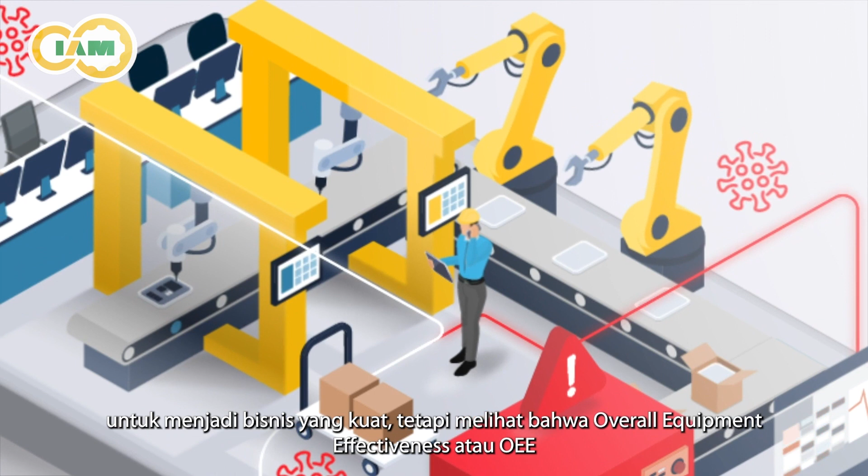Today's globalized world is getting more challenging and competitive. It is forcing the industrial sector to be tougher and aware about leveraging their value, not just through savings, but better asset management and maintenance strategies to become a powerful business. Overall equipment effectiveness (OEE), reliability and availability improvement, and cost-effective maintenance are becoming a must-have versus an option.

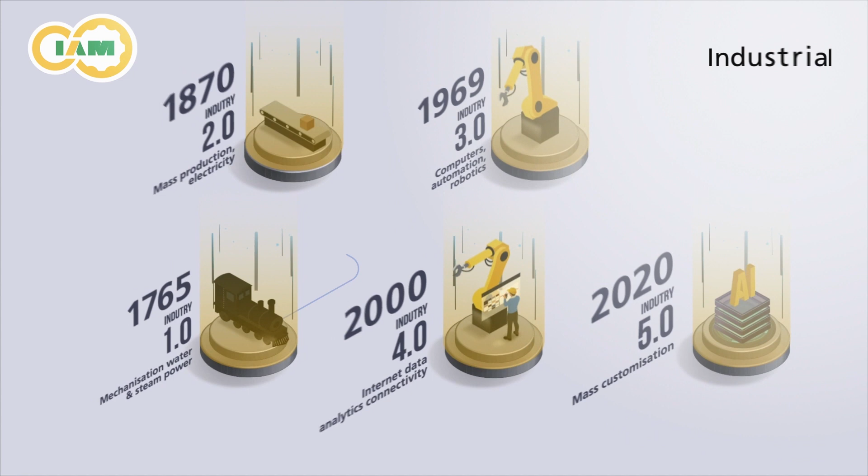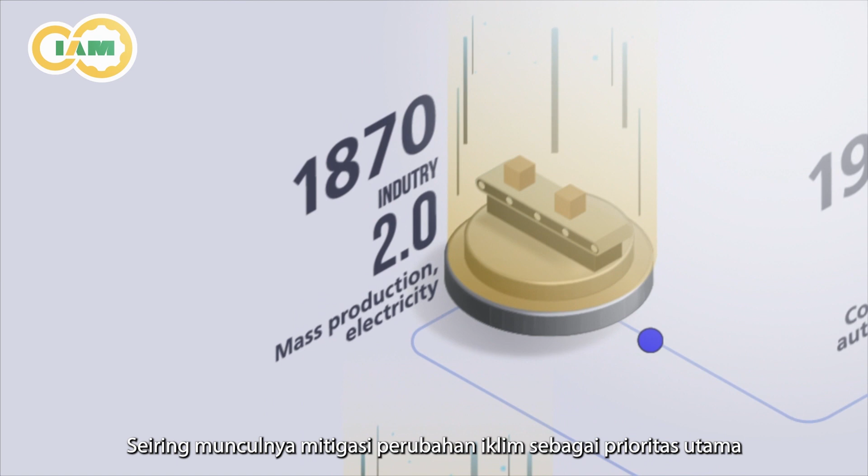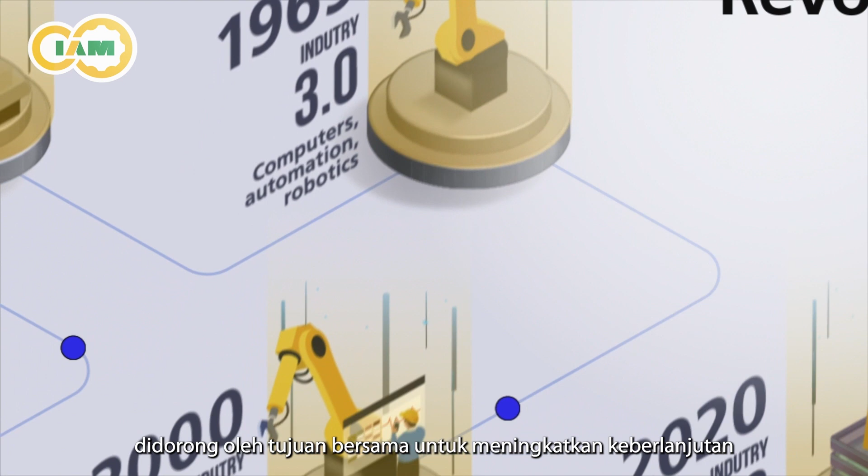Additionally, we need to deal with climate change, the issue of carbon emissions, and the implementation of carbon taxes. This is increasingly encouraging companies to review their operating processes to become more efficient, cleaner, and sustainable. The Industrial Revolution's environmental impact is known to be a bad one, with the increase of production in wasteful and greenhouse gas-emitting industries. With climate change mitigation emerging as a top priority, the next industrial revolution could very well be one where men, machines, innovation, productivity, and profitability are driven by the common purpose of increasing sustainability. A revolution that leads people to consider the environment and focus on doing more with less. Then fully integrated industrial asset management becomes the best solution to this matter.

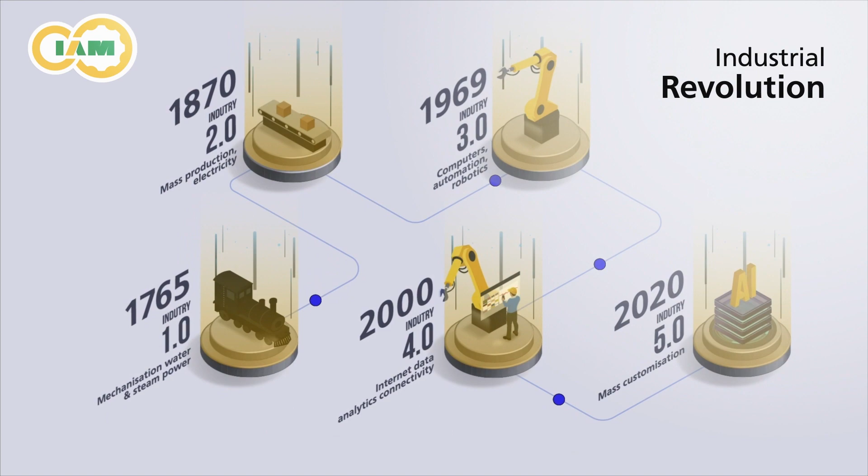The Sustainable Development Goals are the blueprint to achieve a better and more sustainable future for all. They address the global challenges we face, such as poverty, inequality, climate change, environmental degradation, peace, and justice. Every company is encouraged to contribute to the achievement of the United Nations Sustainable Development Goals. Therefore, good asset management is needed, as it inherently contributes to 7 of the SDGs.

Specifically, asset management improves an organization's sustainability by effectively managing expenditures and activities to achieve both short and long-term intended impacts, including the sustainability of operations and performance. Asset management processes clearly demonstrate social responsibility and ethical business practice by improving the ability to reduce emissions, conserve resources, and adapt to climate change. Asset management also improves efficiency and effectiveness by reviewing and improving processes, procedures, and asset performances.

On January 15, 2014, the Technical Committee TC 251 from ISO concluded its work and finally published the set of ISO 55000 regulations for asset management. It is a set of international consensus standards that provide requirements and specifications for an integrated, effective system for managing assets. The development of ISO 55001-2014 follows this structure: context of the organization, leadership, planning, support, operations, performance evaluation, and continuous improvement.

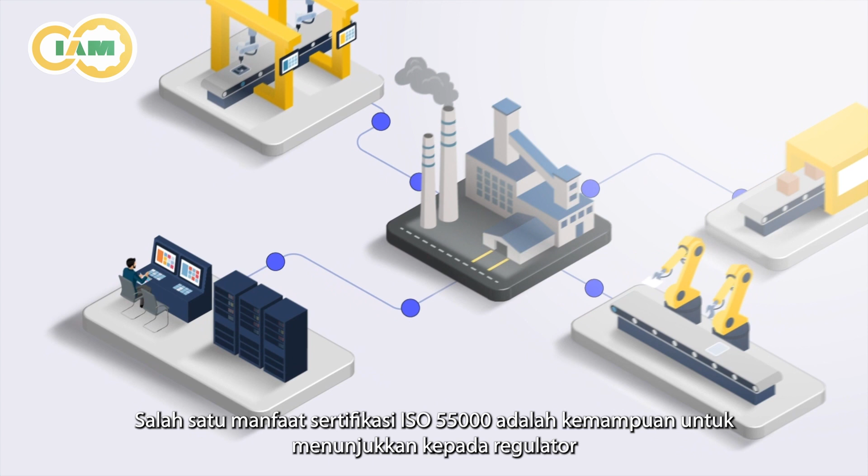The adoption of ISO 55001, ISO 55002, and this international standard enables an organization to achieve its objectives through the effective and efficient management of its assets. One of the benefits of ISO 55000 certification is the ability to show regulators, stakeholders, and customers that the organization maintains its assets in accordance with a stringent level of diligence and quality parameters necessary to achieve and maintain the certification.

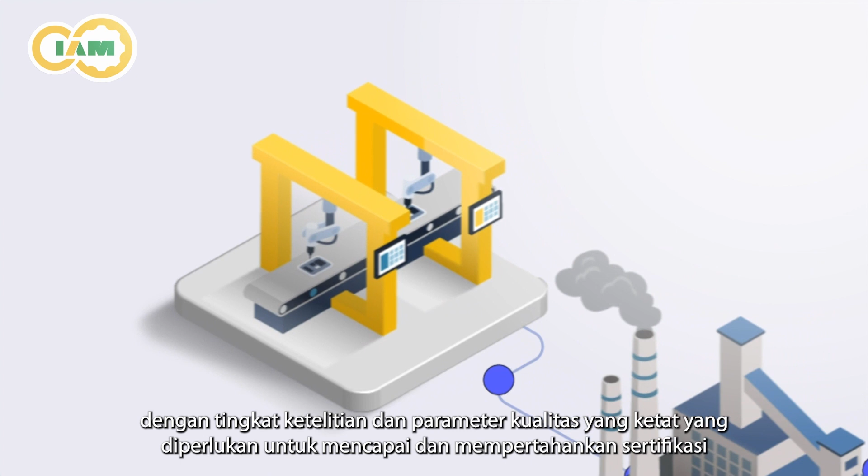Adopting an asset management framework based on the ISO 55000 standard demonstrates that the organization has an asset management system to manage performance, risks, reliability, and costs in a very effective and efficient manner.

An asset management system is any process a company or organization uses to keep track of the equipment and inventory vital to the day-to-day operation of their business. There are many standards and certifications for asset tracking, including ISO 55001, an asset management system standard to help organizations manage the life cycle of assets more effectively.

Implementing the ISO 55001 standard can help companies and organizations obtain control over their daily activities, achieve higher returns with their assets, reduce costs, and mitigate risk. Additionally, establishing the standard raises the bar on performance and effectiveness, and its benefits may be applied to any fixed asset in any organization in any industry.

Every asset goes through stages during its life: design, acquire, operate, maintain, and dispose. Each stage plays an equally important role in ensuring you get the most from your assets. Asset lifecycle management is a strategic and analytical approach to the management of a business's assets, a process of optimizing an asset's reliability and operational performance during its lifespan.

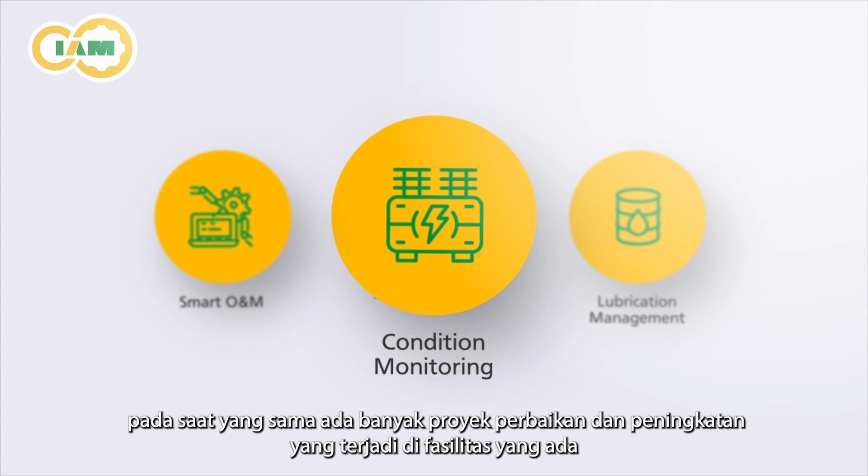Today, there is a lot of investment in new production capacity from many different manufacturing sectors. At the same time, there are many improvement projects and upgrading happening in existing facilities. To support this situation, we are developing these following capabilities.

We have designed and developed IAM as a reliable partner for our customers to achieve their asset management targets and objectives precisely and efficiently. Smart Operation and Maintenance, or Smart O&M,

is a solution designed to help companies increase their profitability by improving the management of corporate assets, increasing employees' productivity, and reducing costs, while ensuring regulatory compliance.

Smart O&M enables you to do asset register, master data, cataloging, while at the same time analyzing reports on condition monitoring, lubricant management, and managing asset integrity efficiently.

Asset information is the fundamental of asset management. Through asset register and master data, a company can easily manage their assets by registering the ID, tag number, details, location, units, working procedures, and even the parts.

IAM helps companies to record asset information by performing asset register, master data, and cataloging appropriately. This neatly registered data will later be useful to assist a company in various crucial analyses in asset management.

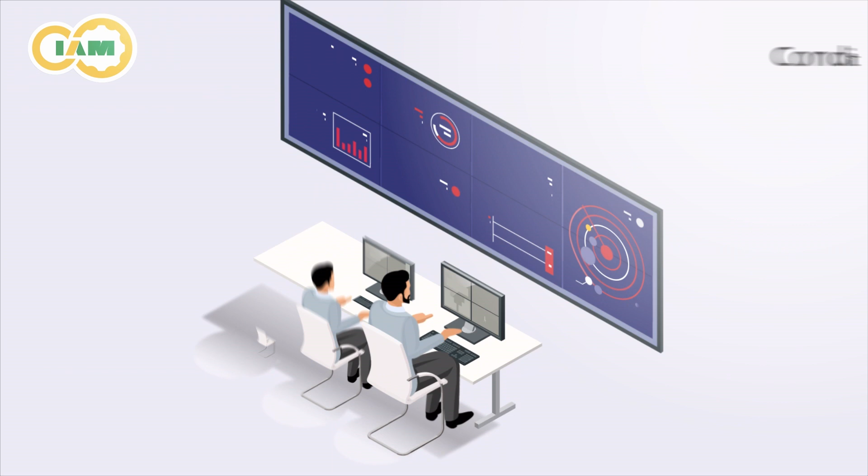Condition monitoring. IAM provides an integrated condition monitoring, a maintenance approach that predicts machine health and safety through the combination of machine sensor data that measures vibration, temperatures, and other parameters in real time with state-of-the-art machine monitoring software.

With condition monitoring, we can analyze any anomalies that occur in a machine or equipment more accurately so that we can prevent machinery and equipment damage or failure.

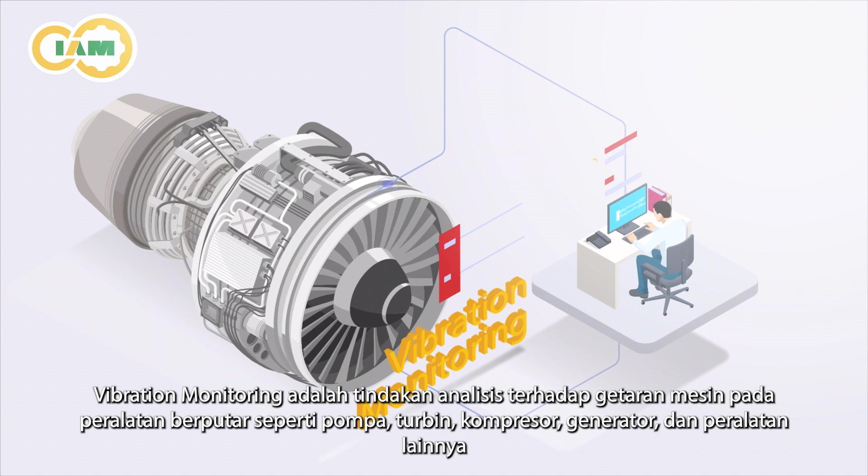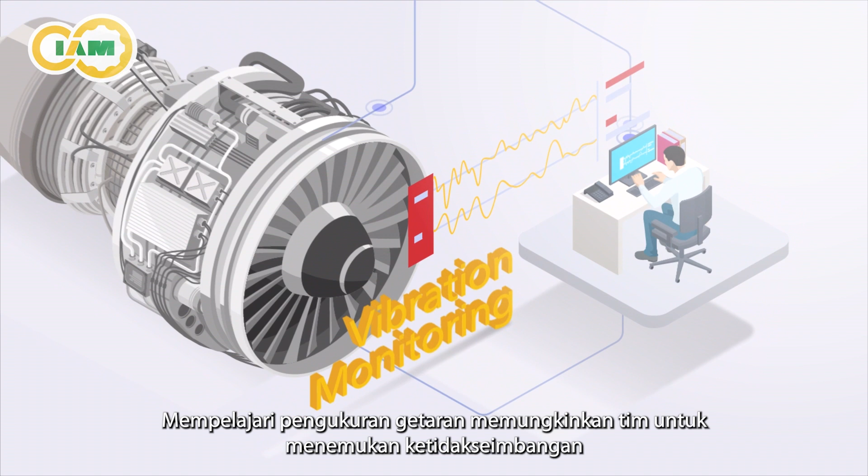Vibration monitoring is an analytical action of engine vibration on rotating equipment such as pumps, turbines, compressors, generators, and other equipment. Vibration monitoring uses sensors and tools to detect changes in amplitude, frequency, and intensity of forces that damage rotating equipment. Studying vibration measurements allows teams to discover imbalance, looseness, misalignment, or bearing wear in equipment prior to failure.

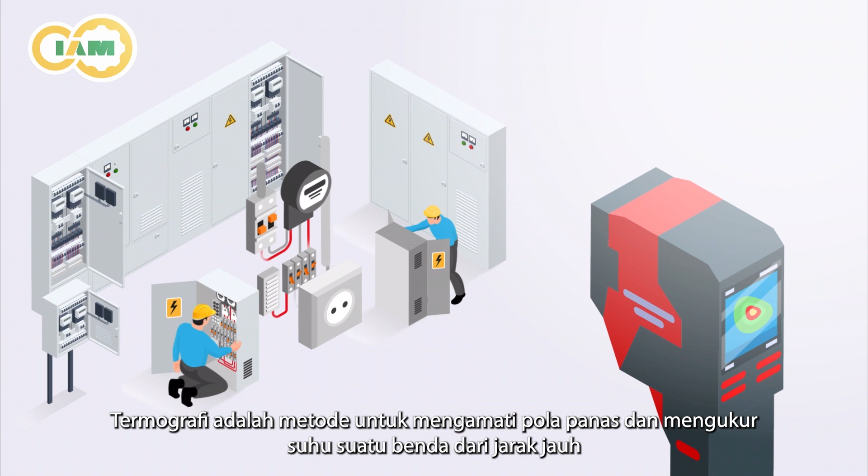Thermography is a method to observe the pattern of heat and measures the temperature of a body remotely and provides the thermal image of the entire component or machinery. Thermography helps you to estimate components' approximate temperature to determine the severity of an adverse condition.

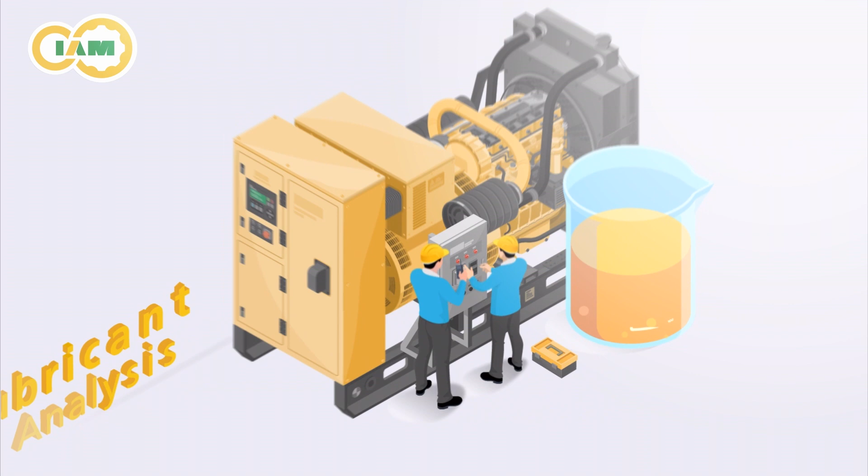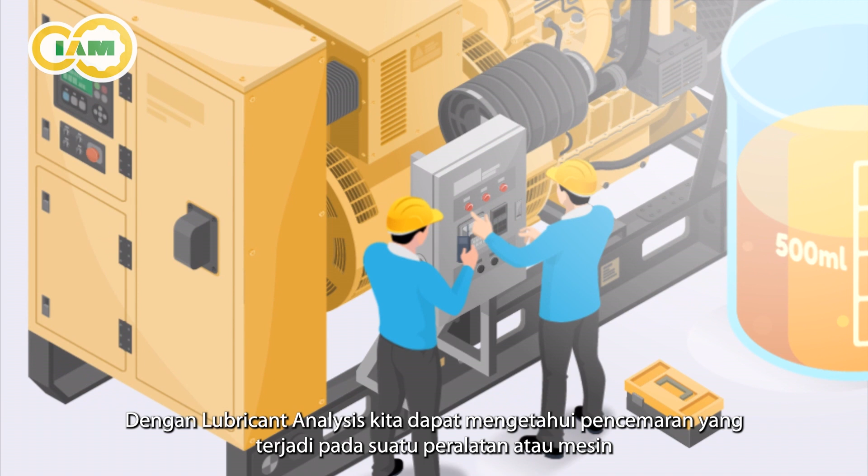Lubricant analysis is an analytical method to monitor the condition of the equipment by analyzing the lubricant in the machine or equipment. With lubricant analysis, we can determine the contamination that occurs in an equipment or machine, such as contamination of water, particles, or other foreign objects.

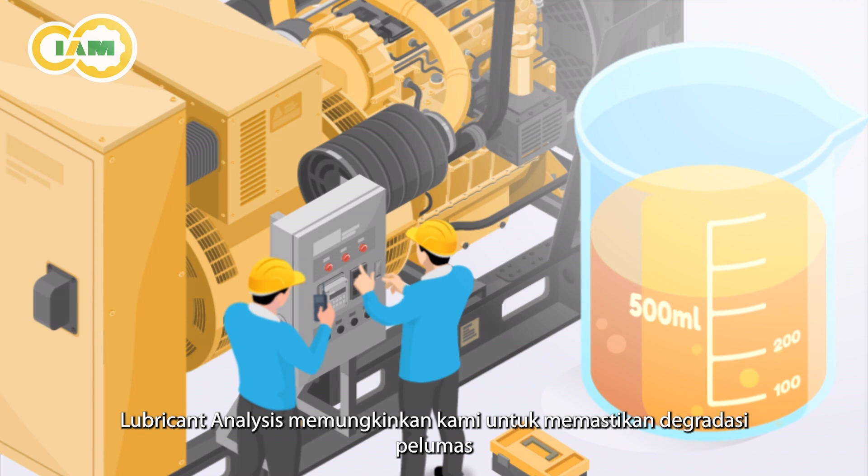Lubricant analysis enables us to determine the degradation of lubricants, as well as helps us to detect the level of wear on equipment made of metal. With that, we can do further inspections on the components that are experiencing wear and tear.

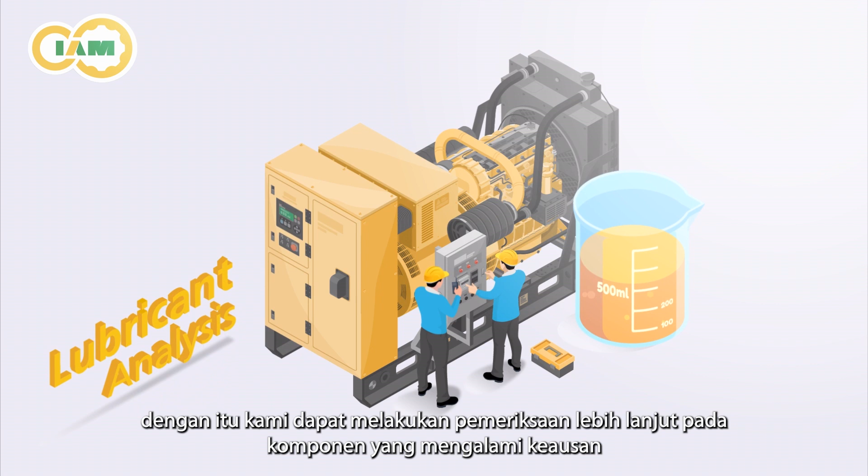Non-destructive testing is a method to determine the condition of the equipment by doing some testing without damaging the equipment. This method is carried out with ultrasonic thickness, which is measuring the thickness of an object using ultrasonic vibrations.

Asset integrity. As part of asset integrity, RAM analysis is a method used to predict and quantify asset performance with certain configuration from a complex system, with a point of view from reliability, availability, and maintainability.

There are several parameters that are considered as key performance indicators within every operation and maintenance activity carried out on equipment, such as availability, reliability, overall equipment effectiveness, failure rate or mean time between failure, and mean time to repair.

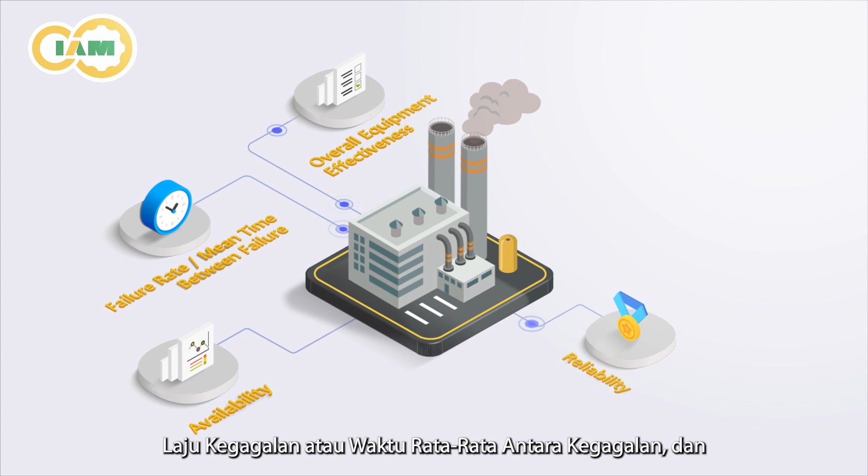IAM provides an asset integrity consultancy to help a company manage its key performance indicators correctly and accurately. It consists of several methodologies, including

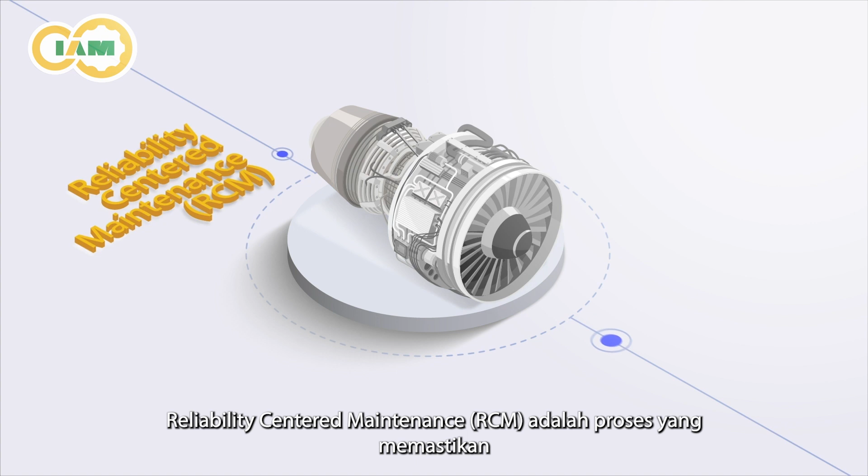reliability-centered maintenance. RCM is a process that ensures maintenance tasks are performed in an efficient, cost-effective, reliable, and safe manner. It is commonly used for rotating equipment and electricals.

Risk-based inspection, RBI, is an optimal maintenance business process used to examine static equipment such as pressure tanks, valves, vessels, boilers, heat exchangers, and piping in industrial plants.

Failure modes and effects analysis, FMEA, is a step-by-step approach for identifying all possible failures in a design, a manufacturing or assembly process, or a product or service. It is a common process analysis tool.

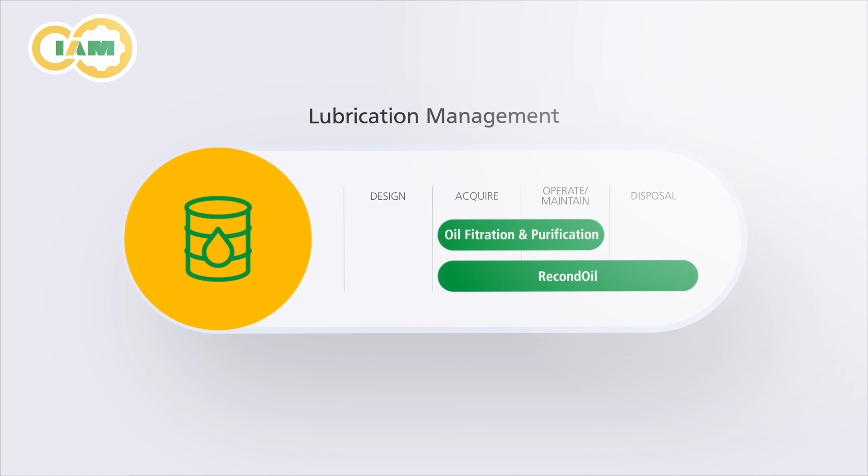Lubrication management. To support lubrication management activity, IAM provides lubricant management solution through various services and methods, including

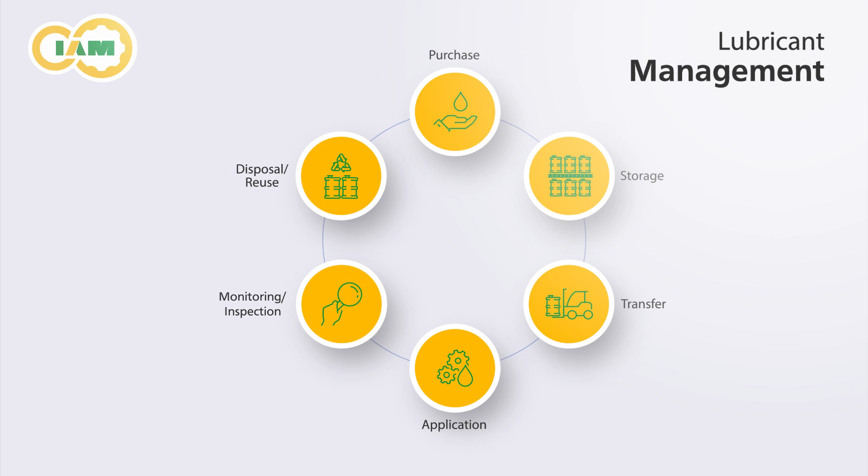oil filtration, which is designed to remove contamination, such as water, particulate, varnish, and/or entrained gases from a wide variety of fluids, including turbine oil, hydraulic oil, gear oil, and fuel oil.

Oil purification, which is removing oil contaminants in order to prolong oil service life.

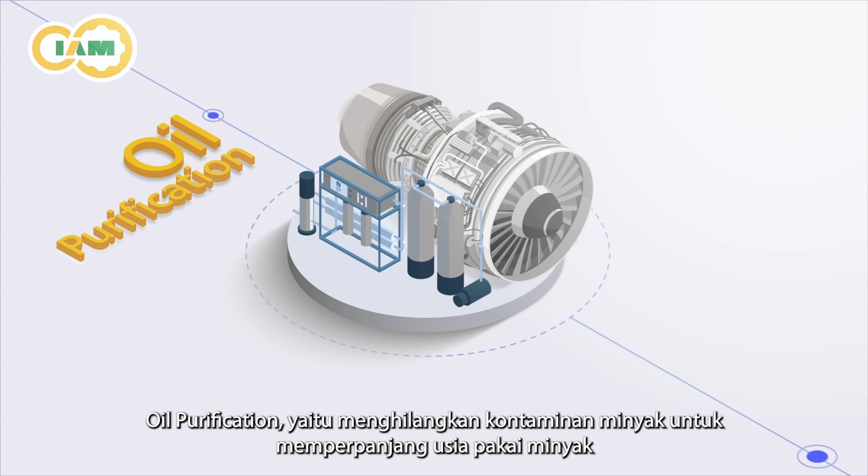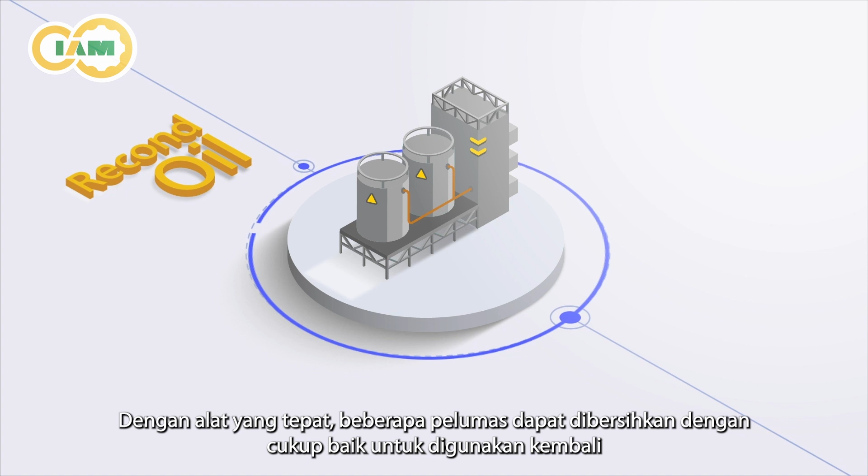Oil reconditioning is an exciting technology for a plant's lubricants. With the right tools, it's possible to clean some lubricants well enough to put them back into service, saving money and time when compared to managing the disposal of old lubricants and the purchase of new ones.

IAM, when it matters to be reliable and sustainable.